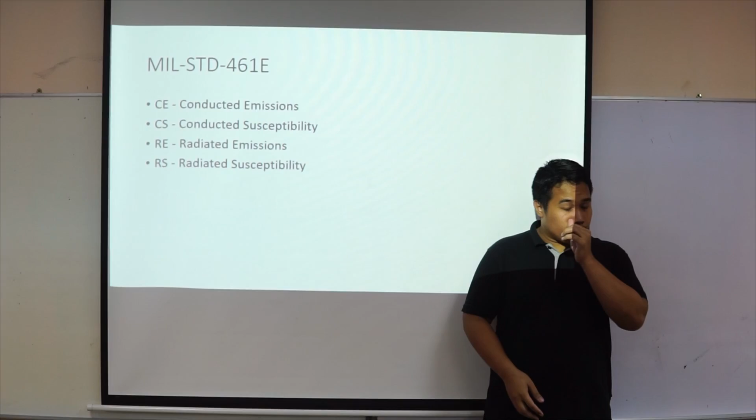So let's talk about the military standards a little. If we compare it with, let's say, commercial aircraft, their need for control of EMC is not so high compared to military. The reason is because military faces a lot of different surroundings. For example, in the sea, in the desert, or in the mountains. So every different condition causes different types of EMC. The earth that contains electromagnetic force sometimes causes disruptions in the equipment. So there are certain standards that militaries put to make sure that their standards are met, the equipment can be used on the field and so on.

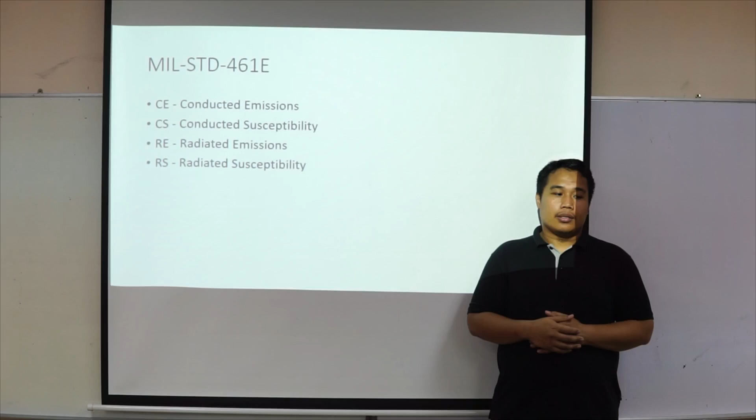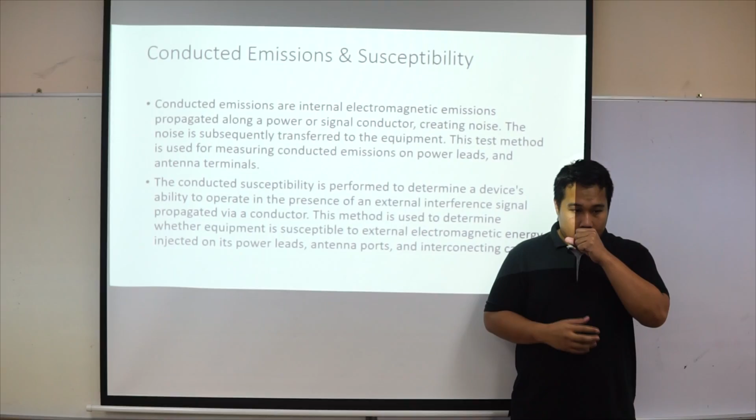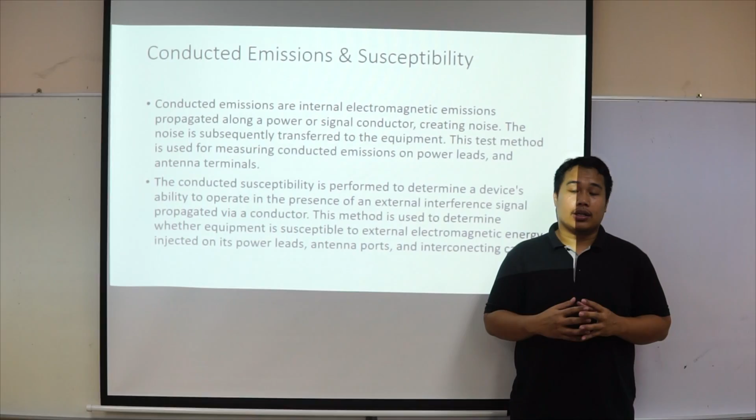Conducted emissions are electromagnetic emissions that propagate along the power or signal lines and create noise. It means it's internal conducted emission. The noise is subsequently transferred to the equipment. Conducted susceptibility is performed to determine a device's ability to operate in the presence of external interference. So we understand two things: the emissions are internal and the susceptibility is external. The military standard makes sure that these two standards are met before distribution, before selling, before application on their equipment and so on. The other two are radiated emissions and susceptibility. It's the same concept, emissions for internal and susceptibility for external causes.

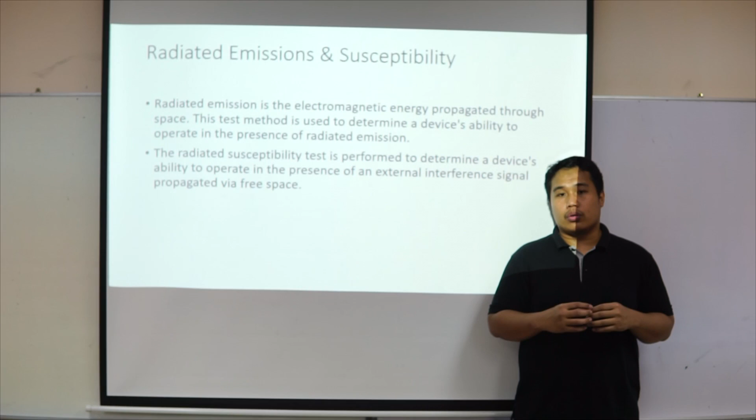This test method is used to determine the device's ability to operate in the presence of radiated emissions. So if there are disturbances within the equipment, these tests are made to meet the requirement before it is distributed to the military force. And carrying on, the radiated susceptibility test is performed to determine a device's ability to operate in the presence of an external interference signal propagated via free space.

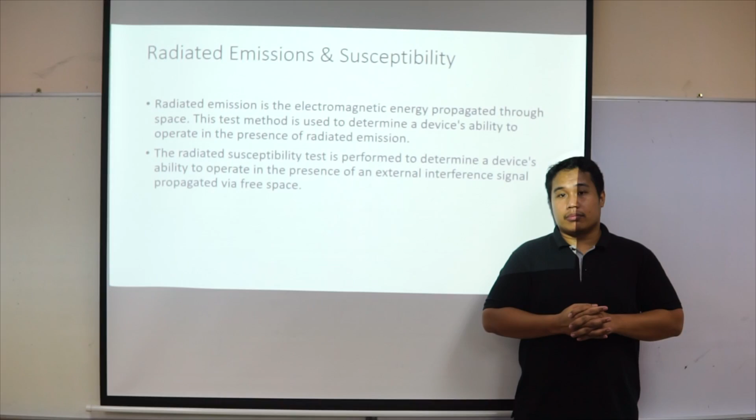So, let's give an example. We want to detect a ship from a distance using our radar system. If there is interference with that signal, we cannot detect the ship. Therefore, there are certain standards that the military has set so that the radiated susceptibility is met before the equipment can be used. In the military, there are attacks to cause malfunction in equipment. For example, the electromagnetic pulse bomb, which shuts down or disturbs the electrical equipment of the military.

The equipment needs to be able to operate in different conditions, temperatures, environments, for example in a hot place, in a cold place, at high altitude, or deep under the water. So the military equipment needs to be able to handle these types of conditions without electromagnetic interruption. Therefore, this is one of the biggest problems in the military. In order to overcome EMC, there are three general solutions which focus on shielding, earthing, and filtering. We won't go into details about this, but we will specifically explain a little part of it.

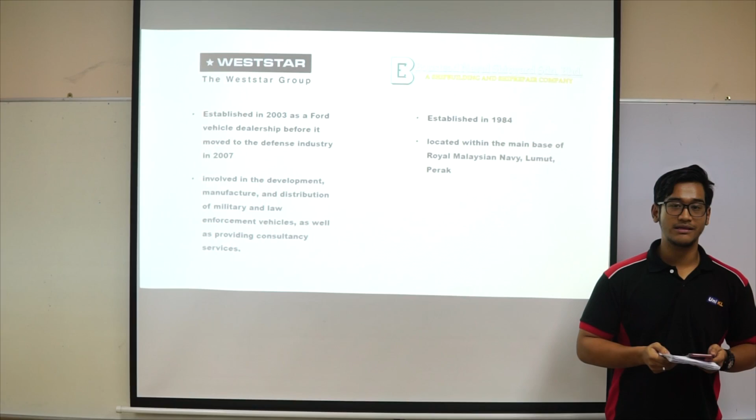So we continue with our target market. After more than a month of research, we have decided and finalized the choice of companies, which are Weststar and Boustead Naval Shipyard. We chose these companies because both manufacture equipment for the army and for the navy. Weststar's group manufactures equipment for the army, while Boustead manufactures equipment for the navy. Another reason we chose both companies is because their headquarters are located in Malaysia. These companies also supply to other countries, such as South Africa and South Asia.

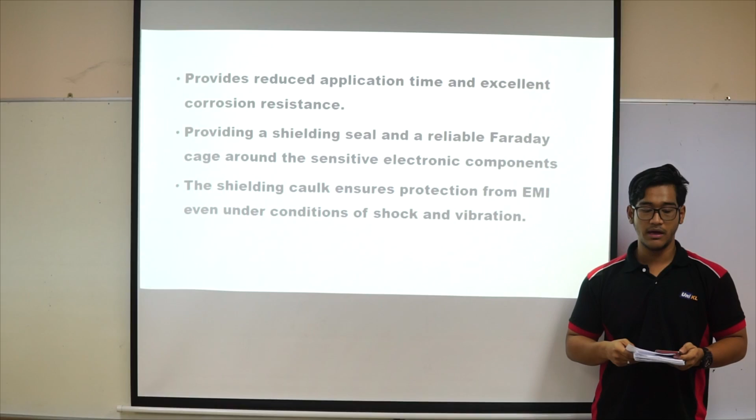So the problem that we have discovered to solve in military technology is the shielding caulk. What is shielding caulk? Shielding caulk can reduce application time and has excellent corrosion resistance, and is applied to the housing of electronic equipment for protection from EMI and electromagnetic pulse. Other than that, a Faraday cage can prevent frequencies from disturbing through EMI. From that, the radar used in the military can get an accurate position, such as for trucks or the air force in the military.

The shielding caulk also ensures protection from EMI even under conditions of shock and vibration. This means the shielding caulk can ensure the equipment that the military uses is long lasting and cannot be damaged easily if something happens to the equipment. So what is a Faraday cage?

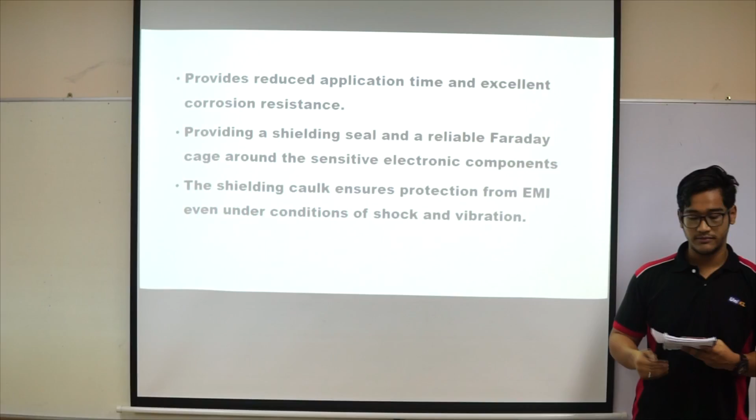Faraday cage is used to block electromagnetic fields. Faraday cage is also used to protect sensitive electronic equipment from external radio frequency interference, also known as RFI, such as radio transmitters. Faraday cage also can prevent the radio wave from interfering with other nearby equipment.

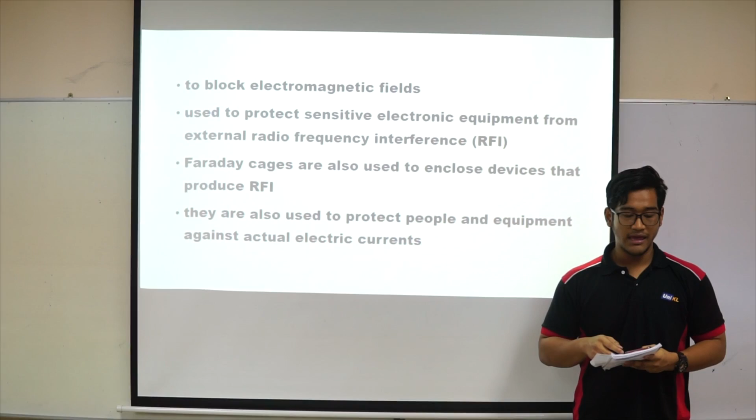Faraday cage is also used to protect people and equipment against actual electric currents. For example, Faraday cage can protect the army in the truck or in the aircraft from lightning strike and electrostatic discharge. Okay, we continue to military application.

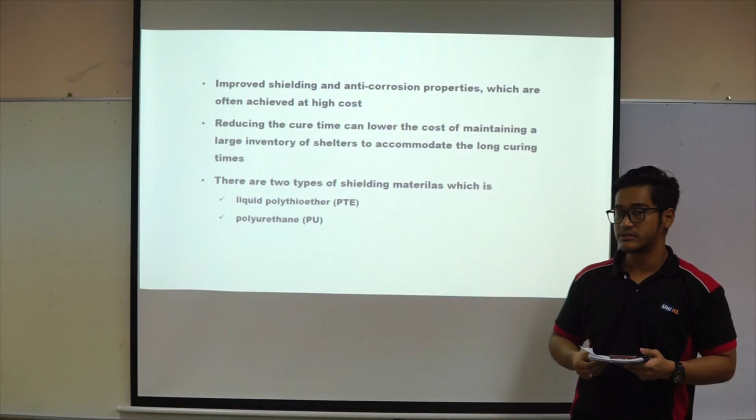What is shielding caulk used for? Shielding caulk is used to improve shielding and anti-corrosion properties, which are often achieved at high cost. This means other equipment or material is very expensive compared to shielding caulk. Shielding caulk can be bought because its price is affordable in the military.

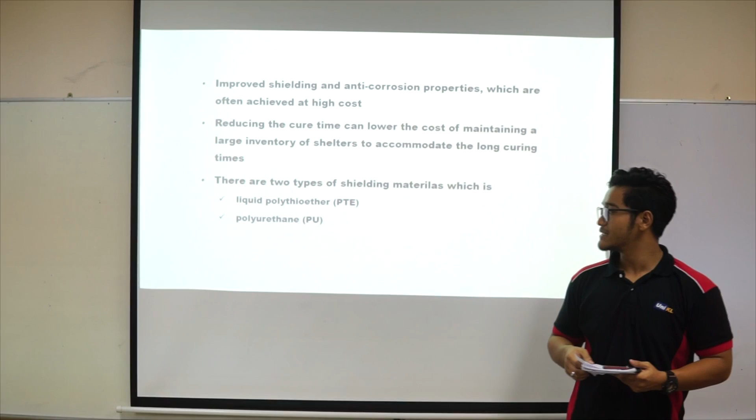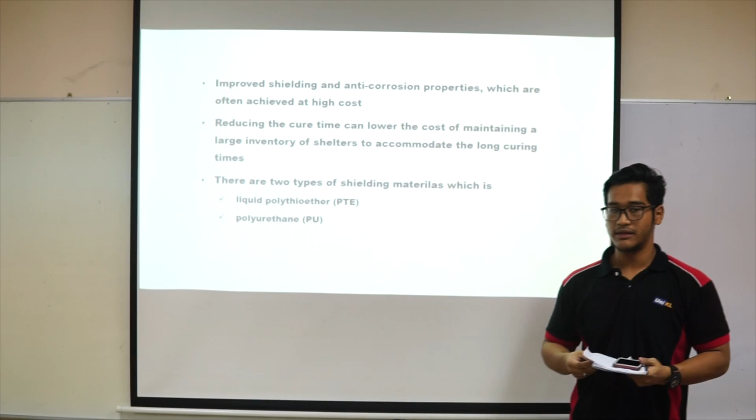Next, shielding caulk also can reduce the cure time and lower the cost of maintaining a large inventory of shelters to accommodate the long curing times. There are two types of shielding caulk, which are liquid polythioether and polyurethane. This material can resist water and solvent, and can be used at high temperature, which means this material cannot melt easily or be flammable easily, which could injure the army in the military.

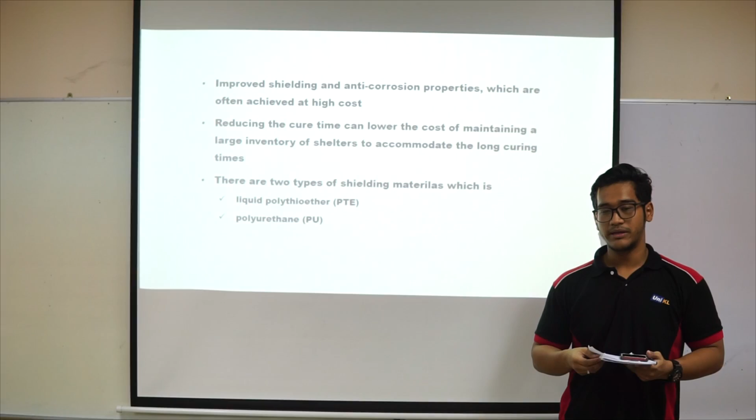Before this, Haziq told us about the solution provided to solve our problem. So right now I want to explain more to identify the solution. In this topic we will present, firstly, the introduction of shielding market. We will explain what types of shield we have today. Secondly, company background and the main business, where we explain what companies sell the shield we researched. Third is competitor analysis.

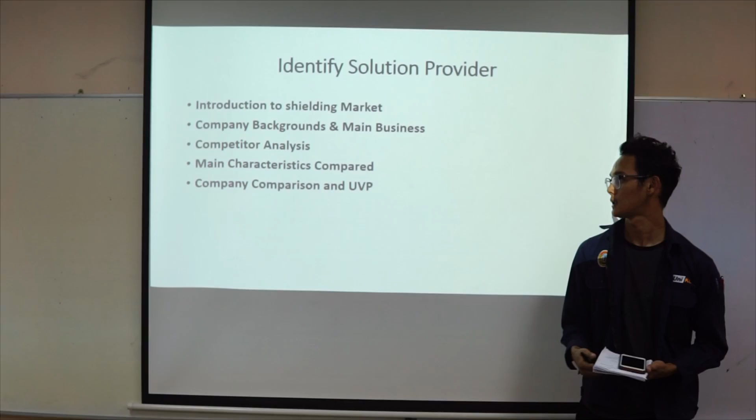From the research we have compared 3 companies based on our solution, that is caulk. And fourth is the main characteristics compared. We will compare the specifications of the products, which is better, and then lastly we will choose which company is better. Okay, next.

Okay, first, we want to talk about the types of shield that we have right now. Today we have a lot of types of shield. As you can see here, we have tape shielding, bar type, foil shield, and lastly caulk shield.

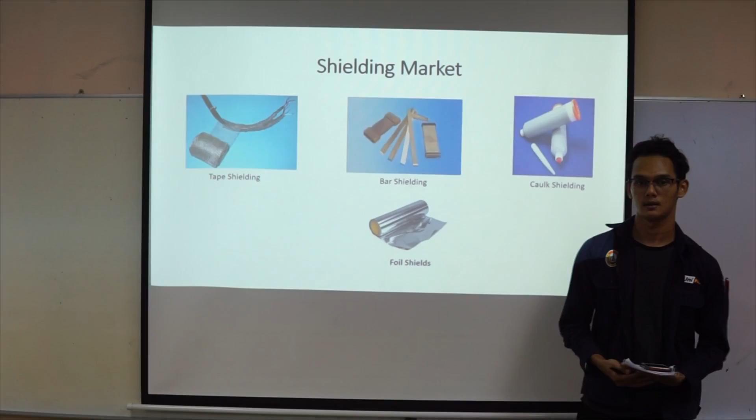From those shields, we searched for what companies sell this type of shield. We chose these 3 companies, the biggest companies in the world that provide the equipment we want. First is Shielding Solutions. Shielding Solutions is based in the US, has been 30 years in this industry, and covers aerospace, military, electronic, and automotive.

Next is the Parker company. Parker is based in the US. It has operated for about 100 years and is in about 104 countries, including Malaysia, for example in Shah Alam, Melaka, Johor, Penang, and Sarawak. Parker also specializes in military, aerospace, electronic and electrical devices, and it provides all the shields that we have today.

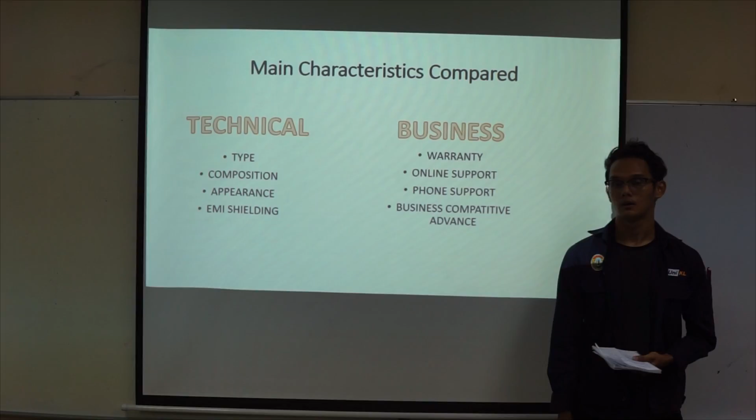Next is Mast Technologies. This is the last company that we researched. It is based in California, USA, and develops EMI absorbing material for integration into military, automotive, electronic, telecommunication, and aerospace. Okay, these are the main characteristics that we compared.

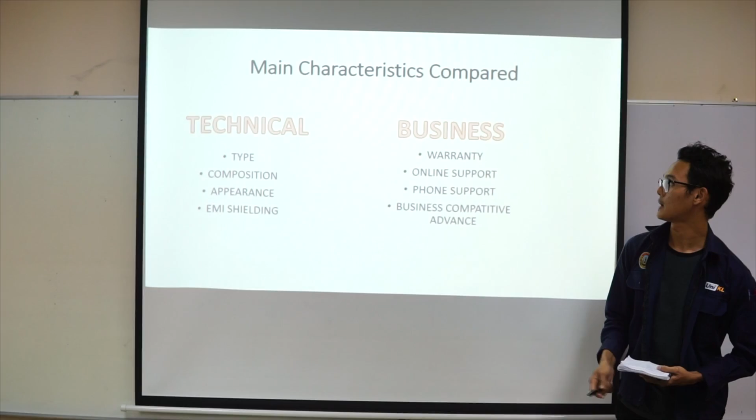We divide them into 2, technical and business. For technical, we compared the type of the shield, composition, appearance, and importantly EMI shielding. Next, we compare the business side in terms of warranty, online support, phone support, and business competitive advantage. Next.

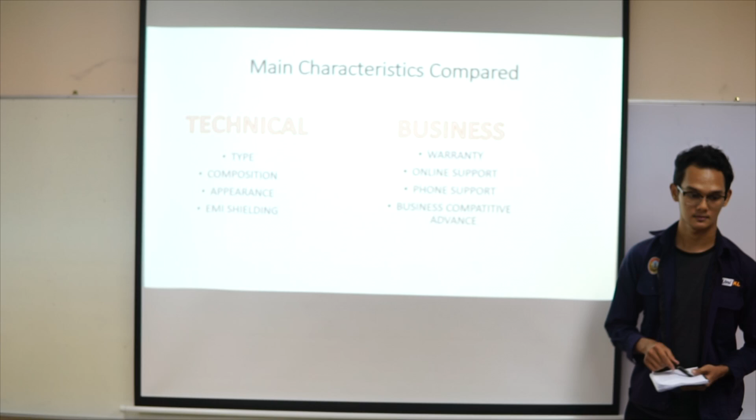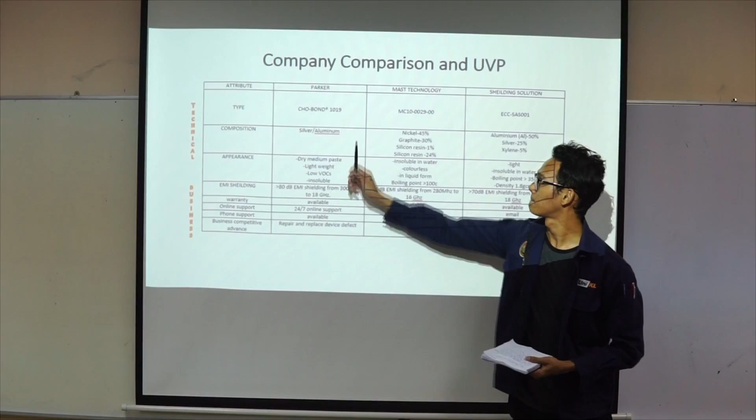Okay, this is a summary of our research. You can see here, this is from Parker company, Mast Technologies company, and Shielding Solutions company. Here is the summary of the spec of the seal that we have chosen. The seal that we have chosen is caulk. This is the summary of the specification of the caulk seal.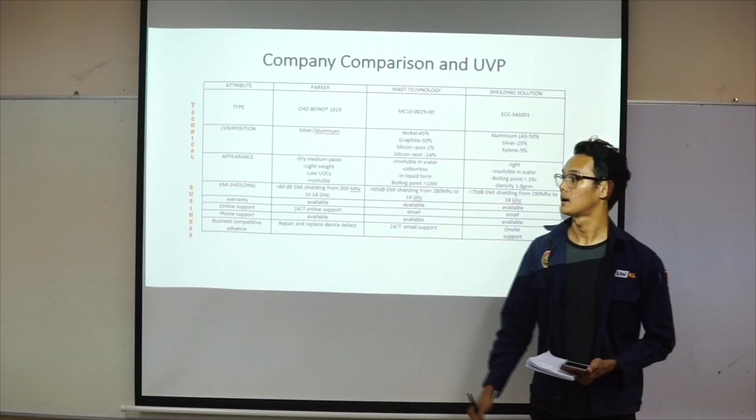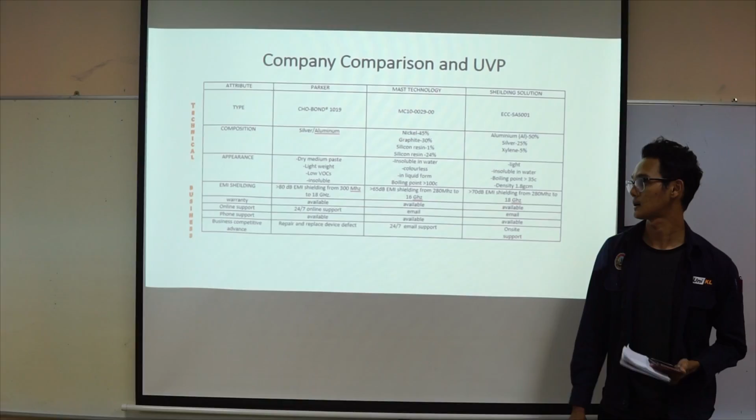Firstly we talk about the Parker company. The composition of Parker's material is silver and aluminium, and the appearance is lightweight and easy to handle compared to the others. For EMI shielding, Parker has achieved 80 decibels, which is close to the military requirement, compared to Mast Technologies and Shielding Solutions at 65 to 70.

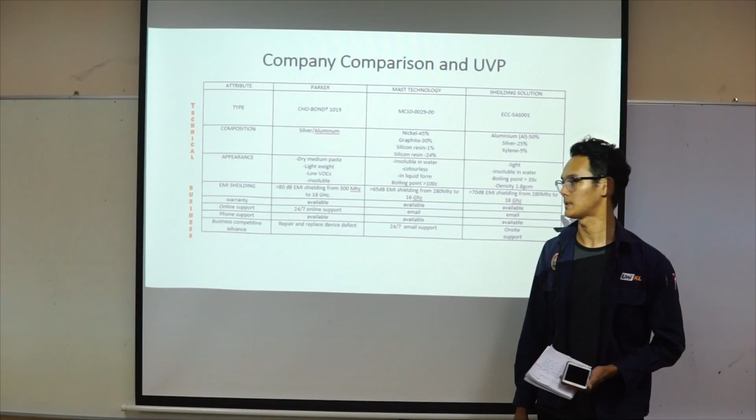The military requirement is about 90 decibels. So we can see that the Parker company is closer to the military requirement. Next is the warranty of the three companies. All the companies provide a warranty for their products.

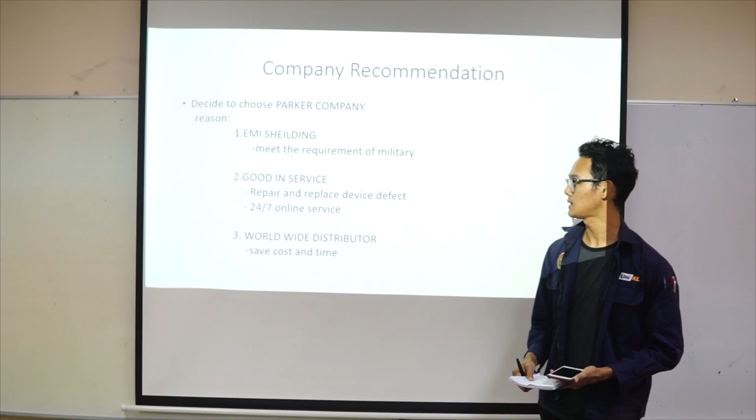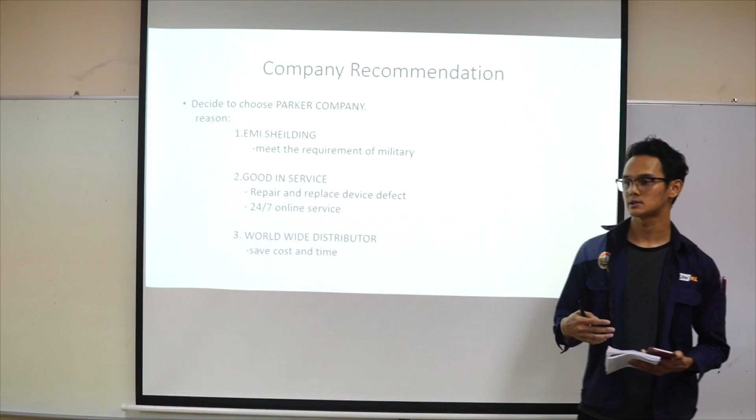From our summary, we have decided to choose Parker company compared to Mast and Shielding Solutions. This is because, firstly, the EMI shielding of Parker is closer to the military requirement. Second, Parker provides good service like 24-hour support, making it easy for customers to contact them.

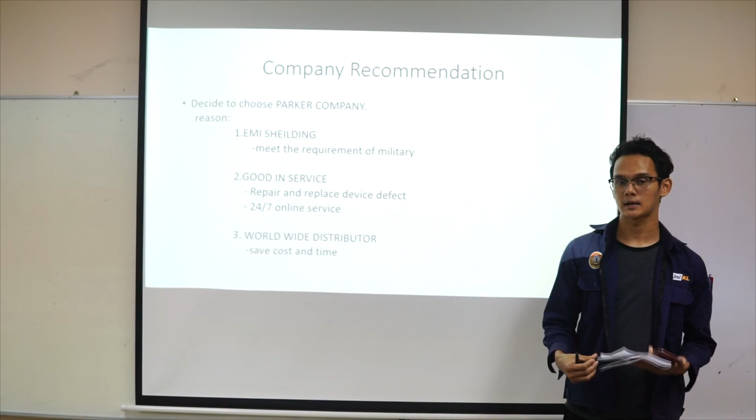And third, Parker company has worldwide distributors, including in Malaysia. So from that we can save cost and time when ordering their products. So we decided to choose Parker company as our solution.